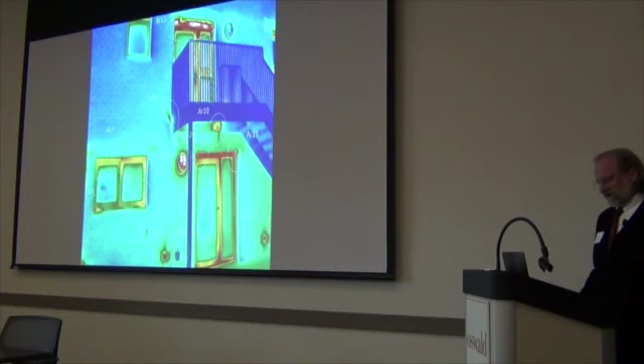...damage to the historic character of the building or unexpected condensation, rot, rust, or other moisture-related problems like insect, mold, or fungus infestations.

It is smart to hire a professional to help with these sorts of modifications to avoid getting into trouble or destroying irreplaceable architectural details in historic fabric.

Lastly, the improvement of the efficiency of heating and cooling equipment, high-efficiency boilers, furnaces, and air conditioning units, along with point-of-use and on-demand hot water heaters, as well as energy-efficient appliances and office equipment, can reduce overall energy requirements and reduce emissions. Altering the sources of energy is also sometimes an option with an older property.

This would entail the addition of solar panels or compact windmills, or maybe even the installation of geothermal heat sources. There's an excellent technical brief on this subject available from the National Park Service. If you want help finding that online, see me afterwards.

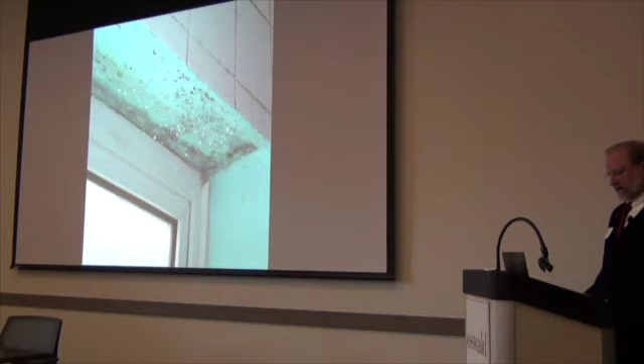Alongside these attributes of historic buildings and strategies for improvement for their energy performance, let's talk a little bit about the other aspects of sustainability that are related to historic preservation.

Preservation contributes to the environmental and economic health and vitality of a place in a variety of ways. It is well documented that designation of historic districts tends to cause an improvement in individual property values, and such designation can protect existing rental space from being demolished.

Preservation conserves resources and the embodied energy that is invested in an existing building or place. It also preserves the cultural memory of craftsmanship, design ideology, and social history.

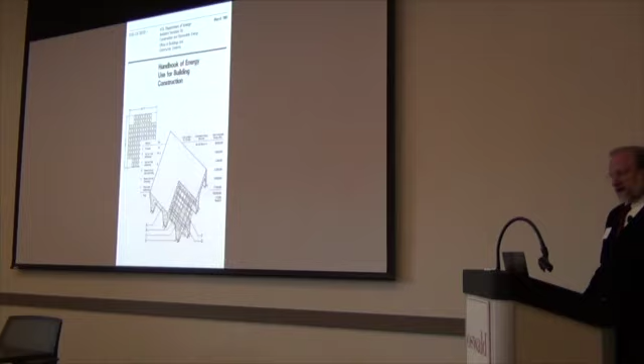Investment in the rehabilitation and restoration of old buildings even produces more local economic activity than the construction of new buildings, because a greater percentage of the investment tends to be in local labor rather than imported materials.

Perhaps most importantly, the preservation of old buildings allows and fosters the essential development of new work, as evidenced in the form of smaller startup businesses and new enterprises because of the lower cost of rent.

The types of innovative, experimental entrepreneurism that is a fundamental part of an economy with the potential to grow and become more vibrant and dynamic is dependent upon the availability of lower-cost, older buildings.

This was certainly the case for Cleveland Public Theater, which operated on a shoestring budget for 2 decades in a pair of low-rent facilities in an old neighborhood that had nearly been written off.

Most Clevelanders, and I would guess that most of you, want our city to develop a dynamic, resilient local economy, safe and appealing neighborhoods, and an environment where government is predictable, just, and provides meaningful opportunities for citizens to be involved in the decisions that affect their lives.

It was definitely important to my business, where I could afford to purchase a group of boarded up and condemned wooden and brick buildings, remove the obsolete fire and water damage sections, and renovate the space for my office.

My development at the corner then inspired and spurred on additional investment on the block, expanding an existing restaurant service business into Cleveland from Medina, creating a new craft beer exporting business, and establishing 2 popular drinking and eating spots in an area that had been scary and dangerous before.

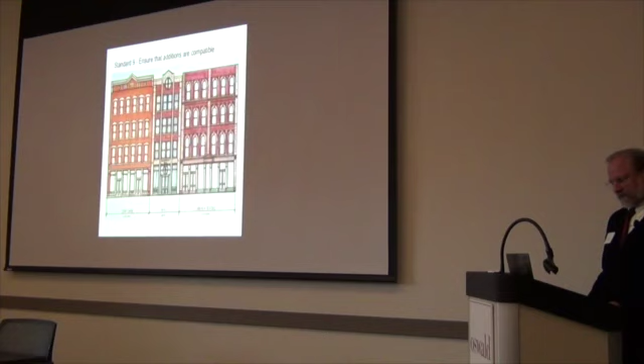If we're to be successful, the policies and practices of government, real estate owners, and design and construction professionals will need to develop better, easier, and more cost-effective ways to improve the energy performance of historic and older buildings, and when necessary, to encourage the construction of new buildings that have low carbon footprints and are efficient to operate.

Sustainability necessarily involves the collective future of Cleveland citizens in an ecological manner, where economic health and diversity is central to the issues of infrastructure management, land use, commercial real estate and housing, historic preservation, public health and education, government performance, and quality of life.

Now, here's the hard part. We need to guard against the ideas of politicians, planners, designers, and developers who would squander our ability to continue into the future. Some of you may have attended the exhibit, probably not many of you, but some of you may have attended the exhibit...

The idea was that almost everything from downtown to University Circle would be cleared to be replaced with a series of very tall skyscrapers loosely based on Frank Lloyd Wright's Mile High skyscraper, and groups of high-rise apartment blocks based on Le Corbusier's Radiant City, surrounded by green space and ponds.

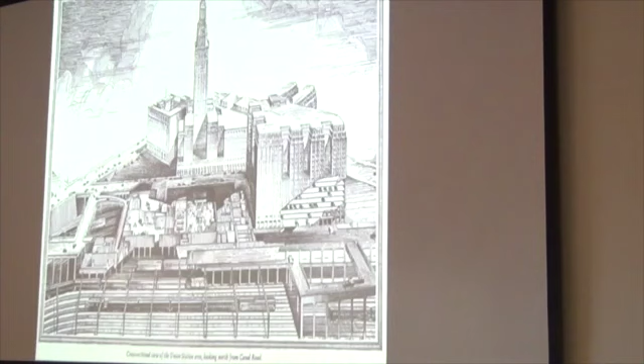Now, here's the big sacred cow and destroyer of the old heart of Cleveland's business district, the Terminal Tower Complex. Thousands of, so they say 1,000 buildings and businesses were relocated or moved out of the way for this building.

And I'm just going to show you about 10 pictures of the buildings that were on this site before they cleared their way. And if you just imagine the kind of diversity of occupants and tenants and building owners and enterprises that could exist in these older buildings versus what we might find in a big office development like the Terminal Tower.

Once they had finished purchasing, maybe people got to retire off the income they had from the sale of their building and the closure of their business.

But once they had it, once it was all torn down, what we have is essentially an empty lot and a parking lot. This is almost the worst thing that we could do, is clear land and create empty land and parking lots.

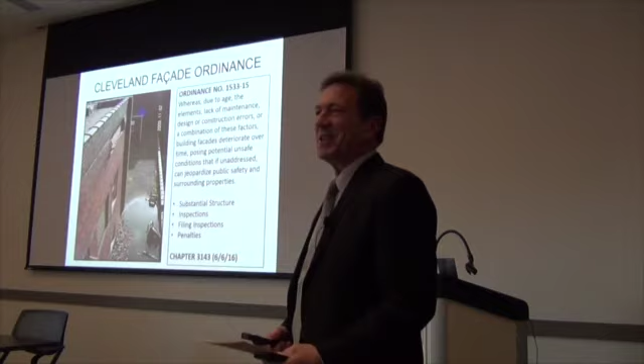Thank you for being here today, and given the fact that tomorrow is St. Patrick's Day, I have to hook it in with a reference to the classic 'Oh Danny Boy.' Oh Danny Boy, the walls and parapets are falling. I would sing it, but I've got my morning voice on.

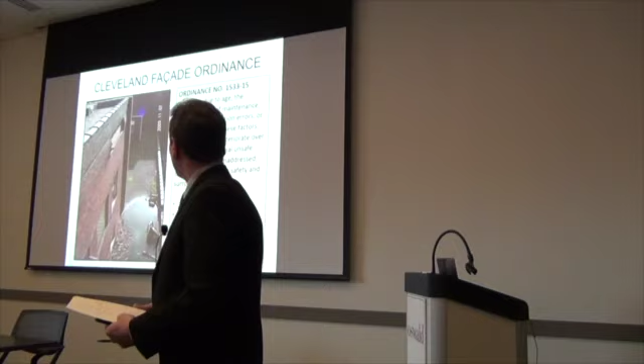Unfortunately, many buildings with brick veneers and facades end up being like this one. This is an undisclosed building downtown, picture taken about 8 years ago, around 2009.

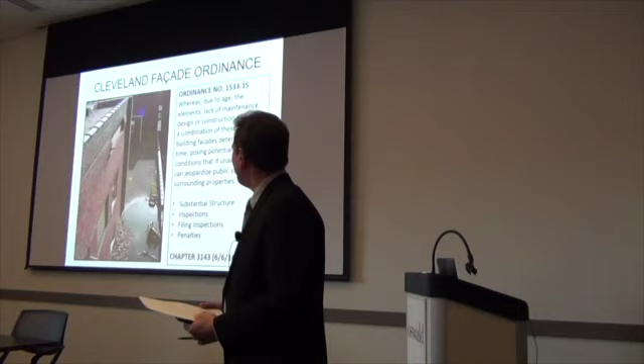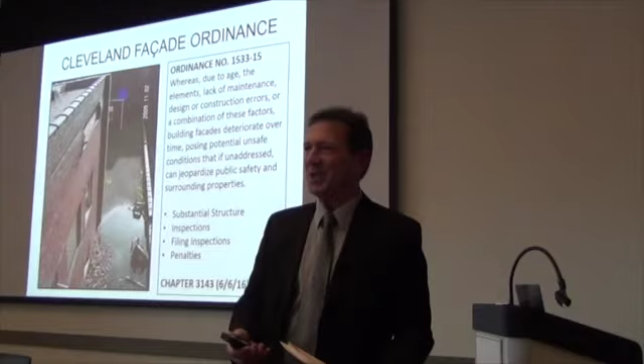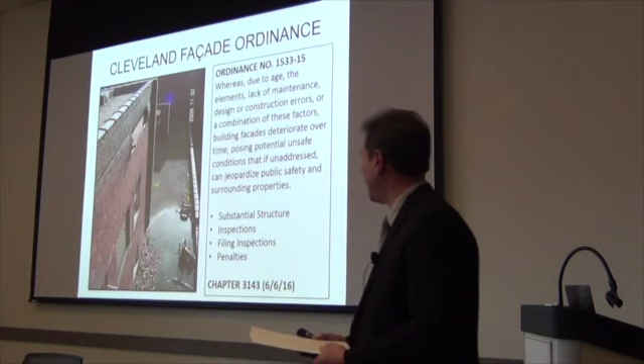A brick facade and veneer can be thought of very much like playing the board game Scrabble, where all those tiles, all those pieces, have to stay connected to the board if you stand the board up vertically. So what you need to do is support those individual pieces with a shelf angle or means of support, a set of hands, and also connect them back to the building, also known as the backup wall.

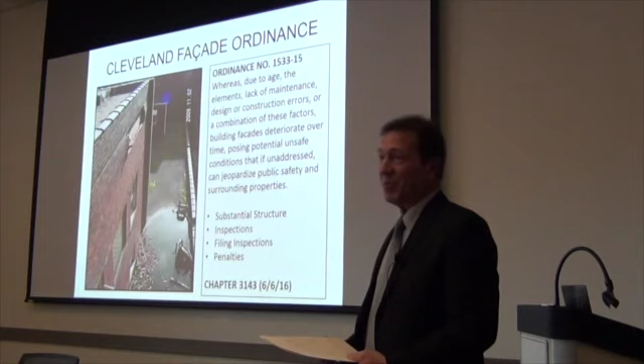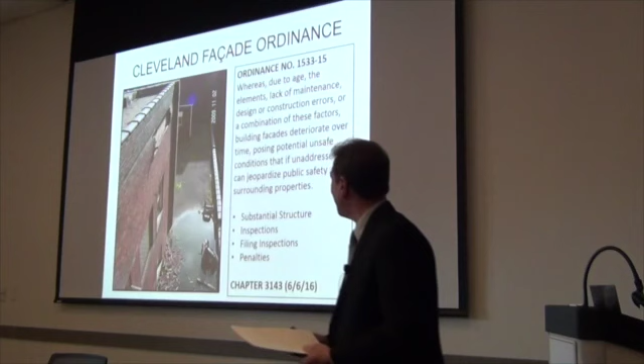As a structural engineer, the challenge is to keep those materials on the building. Everything that went into the building came from the ground — the ore for the steel, the sand and clay for the bricks, and mortar. Gravity makes it all want to go back. So our job is to keep it up where it belongs, up on the building, keep it safe. Nobody wants to see a downtown area be a falling rock zone. That's our role — the architects, the engineers, and the contractors.

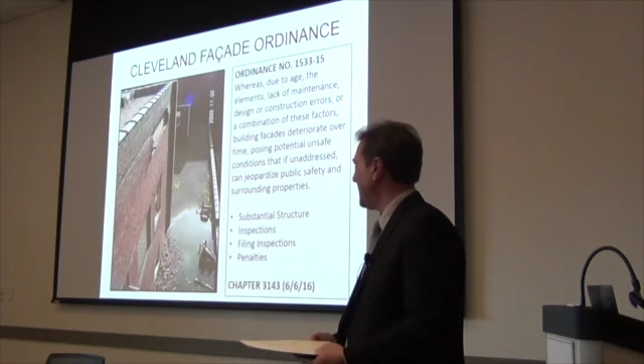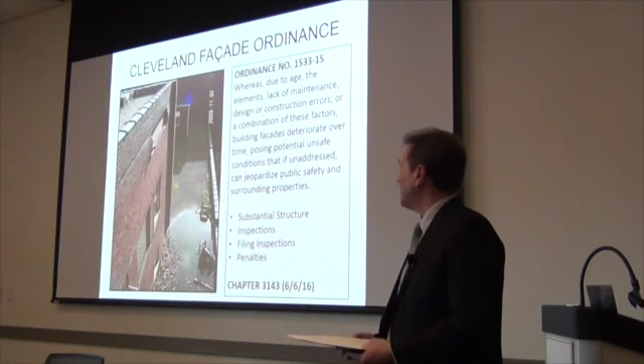We all have to collaborate and make sure the buildings are maintained well and inspected. It's not an easy thing to get out on a building — you often need a boom lift or a rig to look at these up close. You can do a limited survey from the ground with binoculars and telescopes, and now we have drones, which we're getting into using for inspecting and at least getting a visual. But there's nothing better than being right up on the building with a hammer or mallet, doing some light tapping and sounding to predict where material might fall.

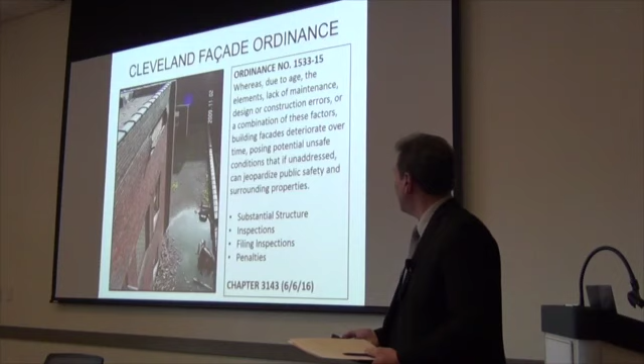This ordinance that was put in place was the result of an incident which happened April 13th, 2015, almost 2 years ago, on East 6th Street. It's called the Garfield Building, and it happened about 4 o'clock in the afternoon. It was a very cold winter, the winters of 2013 and 2014 into the spring of 2015.

Very brutal cold — as materials get cold, they tend to shrink and contract on a building, and as they heat up, they elongate. This building wall, the west wall, was about 200 feet long, built for years and years with no joints in the wall. In the old days they would build walls solid and thick, sometimes a foot or two feet thick, of brick and tile, elongating and contracting over the years with temperature changes.

On top of that, there's a sloping penthouse roof behind it that tied right at the back of the parapet. So for 120 years, snow and ice filled the trough behind the parapet, giving it a little push every time the water would freeze and expand. That portion of the wall was very vulnerable.

So what happened on April 13th — it was the first 80-degree day, and the sun was baking on that wall about 4 o'clock in the afternoon. About 50 feet of the parapet fell, about 4 foot tall and 50 foot long, and that's what happened down on the street.

Now, these people were very fortunate. There were 5 occupants of this vehicle. They had just left it after parking 10 minutes before this happened. They went to dinner, went to a Cavaliers basketball game, came back 6 hours later, and their car was being loaded onto a flatbed and hauled away. So they were very fortunate.

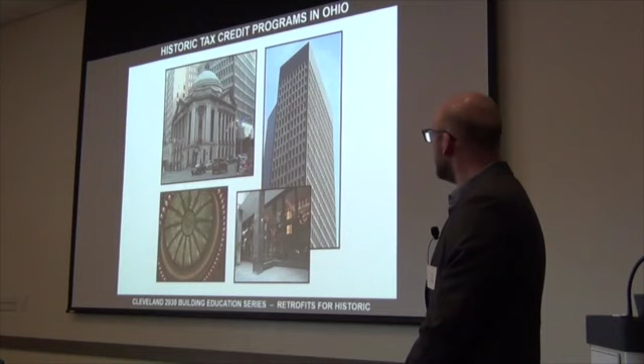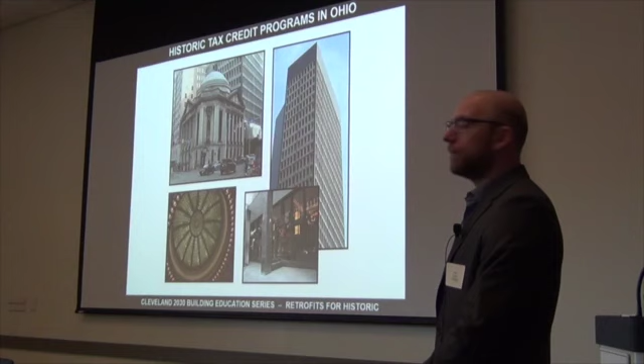Just as some examples, I know we're going to be talking about the 9 later, and this is a good example because obviously the Rotunda building you would expect to be historic, and it has been listed on the National Register for some time, but Breuer Tower was not, and was originally contemplated for demolition, and at that point historic tax credits actually could not have been used on the tower because it had not been designated. So there had to be an extra step to expand that National Register nomination to include the Breuer Tower before the tax credit could be applied to that portion of the building.

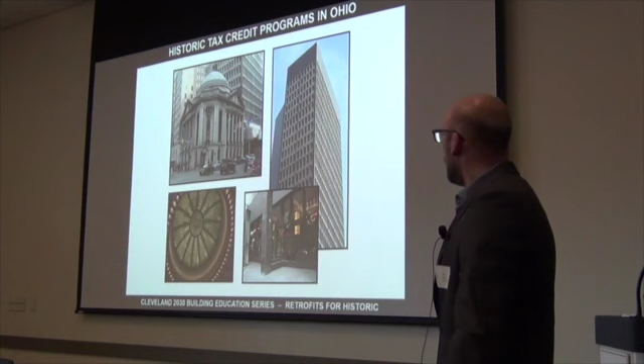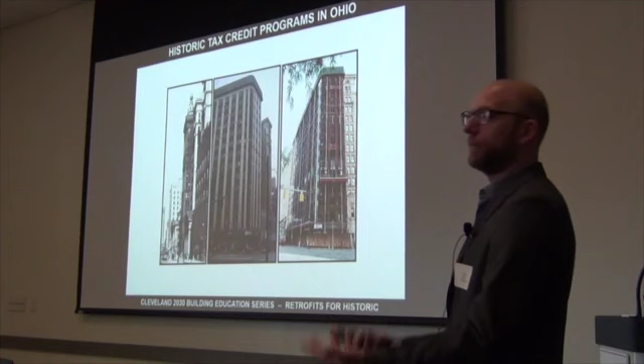Schofield building is part of a historic district, but as many of you know, the facade was completely covered. So before it could be formally designated as a contributing building within the historic district and therefore eligible for tax credits, the entire false facade had to be removed. So that was just the initial step just to get the building qualified.

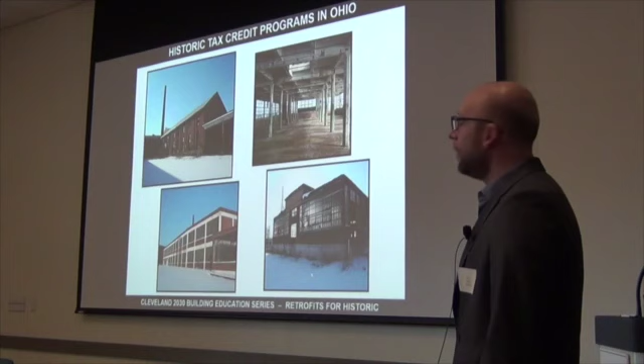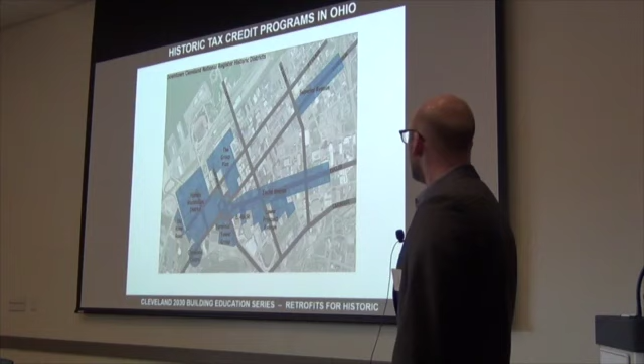And so within those districts, buildings are designated as contributing or non-contributing. And if they're a contributing building within the district, meaning they're old enough and they still have their integrity, then they qualify for the historic tax credits. So again, you can see a pretty large area of downtown Cleveland is within historic districts, so these tools are available to a large number of properties.

The two basic tax credit programs: there's a federal historic tax credit and a state historic tax credit. At the federal level, it's a 20% tax credit, and that 20% is related to what they call the qualified rehabilitation expenditure. So all the money that is spent on rehabilitating the historic building, you're basically going to get a 20% credit against that cost that comes in the form of a tax credit. So that's all the hard costs. It's also many of the soft costs associated with the development.

The big categories that are not included in that qualified expenditure basis: acquisition is not included, any enlargement of the building, so if you're making additions, those expenses would not be included, and things like site work or anything outside the envelope of the building. And then finally, anything that's personal property, so appliances, things that can be taken out of the building would not qualify for this credit. But all those other expenses get put in the bucket, and 20% of that comes back as a federal historic tax credit.

There's no limit on the amount of tax credits. This is a long-standing federal program, and as long as you follow the process and follow the rules, and you have a qualified building and project, you get this 20% federal tax credit.

There's a three-part application process. Part one is just, do you have a historic building or not? Is it on the National Register? And if it's in a district, does it contribute to the district? Part two is about what you're going to do to the building, so that's making sure that the building is going to meet historic standards. We'll talk a little bit about that in a second. And then part three is when you're done with the project, documenting that you did what you said you were going to do in part two of the application, and showing the completed work.

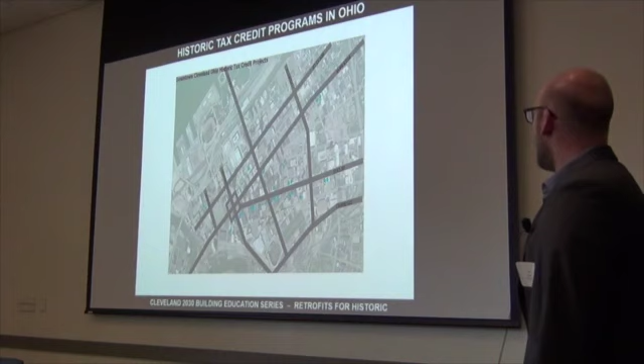If you're doing a historic tax credit project, you have to follow the Secretary of the Interior standards for rehabilitation. That's just a set of 10 broad guidelines outlining what it means to do historic preservation. There's a large collection of guidelines that go along with these standards giving much more specific information about how the standards are interpreted and how to do these things technically. A lot of good information is on the National Park Service website.

Basically what this is saying is repair something before you replace it. If you have to replace it, do it in kind if you can, or with something that matches. Where you need to make changes, do it sensitively so you don't destroy the historic character of the building. But there's a lot of flexibility in terms of the use of these credits and the application of the standards. Sometimes I know it scares people off, but really there's a ton of flexibility.

This is the Southworth building over on Ontario, a recent project, and a common problem in these downtown buildings where you have vast areas of dark, deep spaces toward the rear of the building that you can't really activate for residential use, which is the dominant market in downtown Cleveland now.

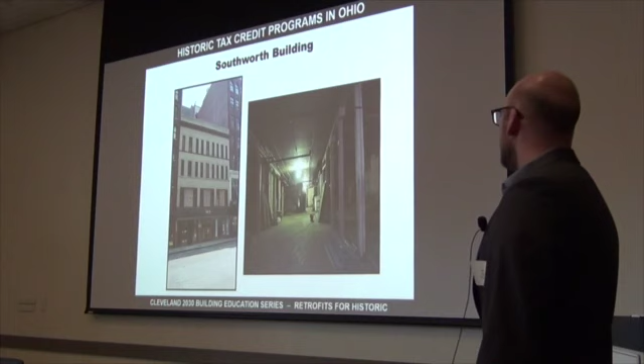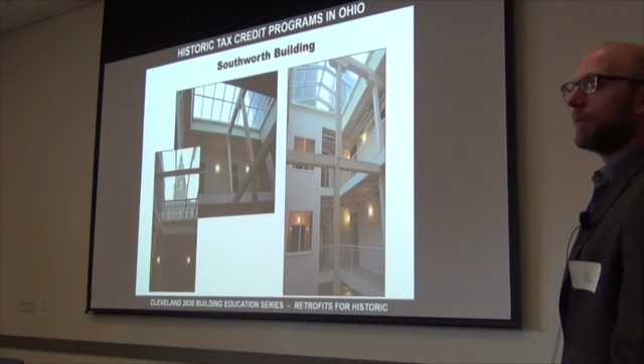So this is the same building. We cut an atrium down through the back part of the building so that you can get light on two ends and get viable housing space in the back. It also makes for a really compelling space, something that's inviting and attractive to residents.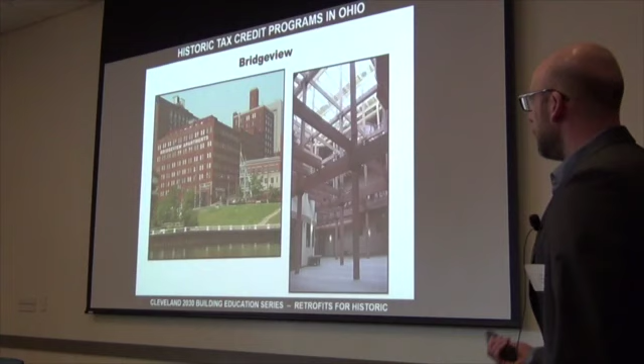Many of you may have seen the Bridgeview atrium—similar thing, created through a big warehouse building, very deep and difficult to convert for another use. Cutting this atrium down through brings the light in that allowed all those apartments to go into the building, and that was all allowed through the historic tax credit program. You can see we also did some rooftop construction, so those kinds of things certainly can happen.

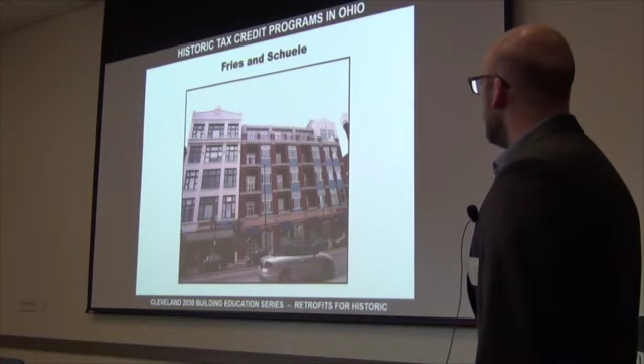Everybody remember when West 25th looked like this? It was really not too long ago, but hard to believe. So that's Fries and Schuele, and again, additions, while not qualified for the historic tax credits, certainly can happen as part of a historic rehab project—that's common particularly for a smaller building. So that's one that was filled in with a new addition: apartments in the historic building and condominiums in the new. You can see the wall of the historic building then becomes part of the interior courtyard.

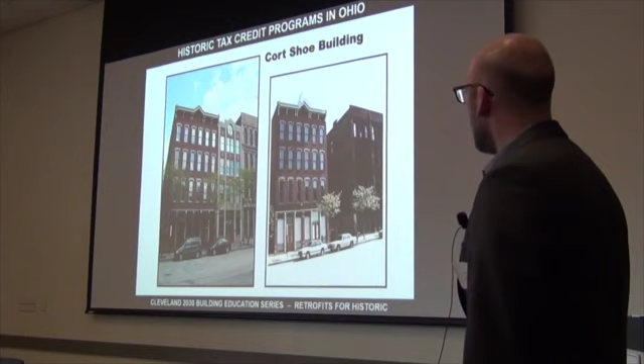This is our office—it's another infill project in the warehouse district. And there's my contact information.

So yeah, just again to recap, it's a really important tool, absolutely necessary in most of these historic rehabs, and a great resource for building owners that want to rehab their buildings. Thank you. Questions? What about government buildings—what aid or funding can they get for renovating some of these historic buildings?

Since the building has to be income producing, it can have tax exempt tenants, which happens all the time. But government entities have a hard time using historic tax credits—they rely on other sources of funding. Yeah, it does have to be a privately held, income producing property, so you can't use this on your own house or anything. You also can't create condominiums, at least for the first 5 years of the project, because you're not allowed to sell the property for 5 years after you complete the rehab.

Does that mean 501c3s that own the structure don't have any benefit from this? 501c3s are a tricky animal—they can absolutely use it. A lot of nonprofit organizations have used this. The Cleveland Institute of Art, for example, their building on Euclid, the old Ford Motor Company plant—that's a historic tax credit project. It creates some complications, particularly if the nonprofit occupied the building prior to undertaking the rehab project, but a lot of times there are ways to work through that. So nonprofits typically can take advantage of these, and often do.

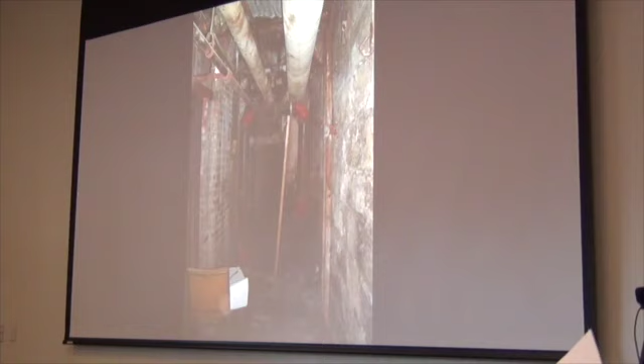My first visit to the property was in the fall of 2007, quite a while ago. I toured through the property with one of the people on the development team. He showed me its current condition and asked what I thought about trying to do something different with it, which I told him I thought was crazy. I didn't know how it was going to happen, but somehow he convinced me to be involved. I have this photo here that shows where this really all started, the process of putting this building back together.

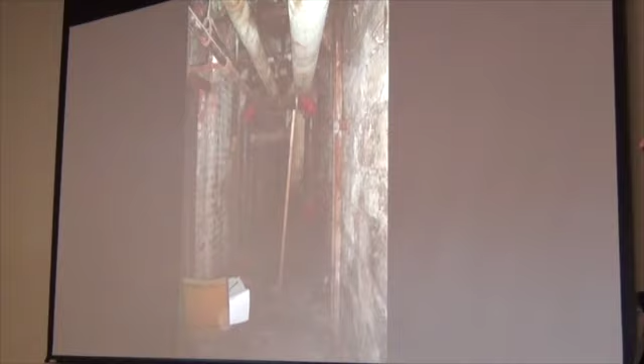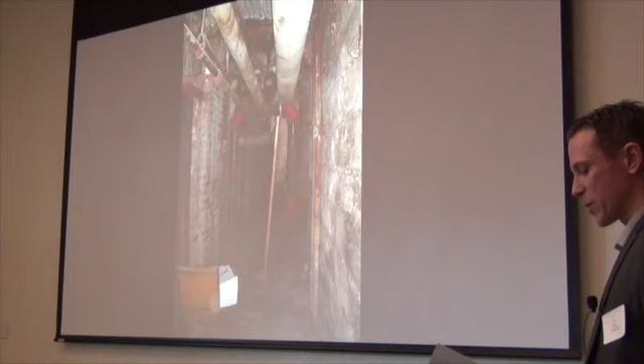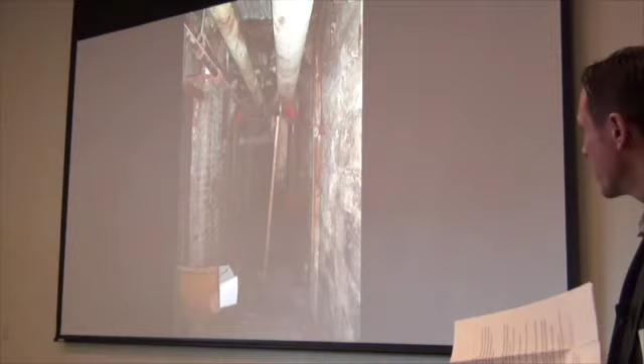As Peter had mentioned earlier, the first step was to roll the dice and pull that curtain wall off the building to reestablish it as contributing to the Euclid Avenue Historic District. To do that, we had to get mast climbers on the building on a tight site, to access the panels and start pulling them off. Even getting to the point where we could have the mast climbers was complicated, and I spent quite a bit of time in the basement and in these sidewalk vaults. We had to do some analysis to figure out how to put substructure through the sidewalk vaults to support the weight of the mast climbers, just to get to a point where we could start to peel off the curtain wall and see what lied beneath.

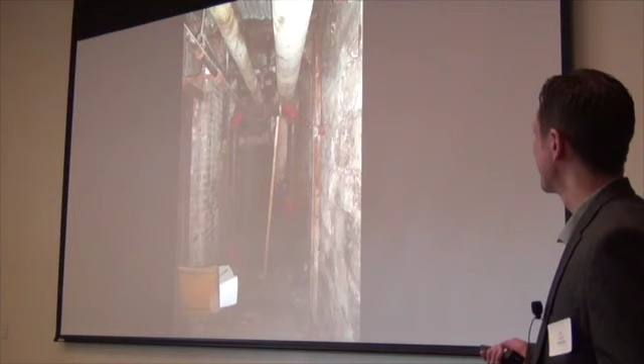I guess they figured if this didn't scare me off, nothing would. This is just showing a bit of progress on taking the curtain wall off. We were all curious to see what we would find beneath.

Essentially what we were left with was the face brick was in relatively good condition, not much of it was damaged. But the curtain wall, where it had been placed onto the building, was just tight enough into the original masonry that they blasted out every detail that had any real relief to it. So a lot of the decorative terracotta elements have been either completely removed or severely damaged. This is a shot of essentially what we were left with when all the curtain wall had been removed.

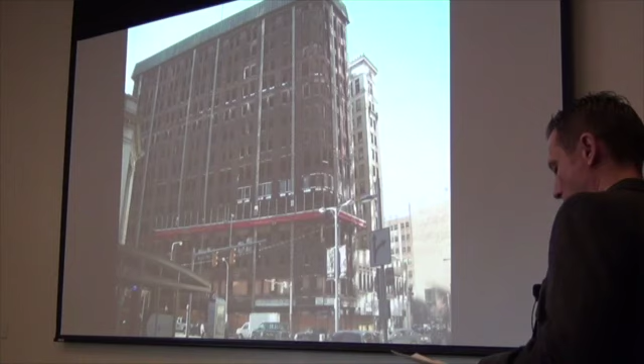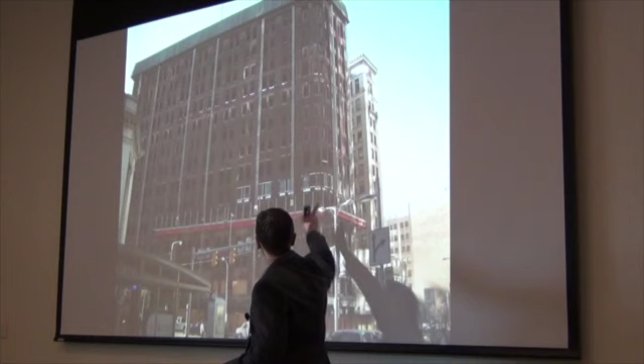In spite of this appearance, as Peter had mentioned earlier, it was established that the building would be considered contributing to the Euclid Avenue Historic District, and we would be able to move forward with the tax credit process. One funny thing to note in this photo: if you notice there's still some windows in place right through here, we had a period of overlap, just a week or two where the last tenant in the building, who we were helping to relocate, had to stay in business. It was a dentist's office.

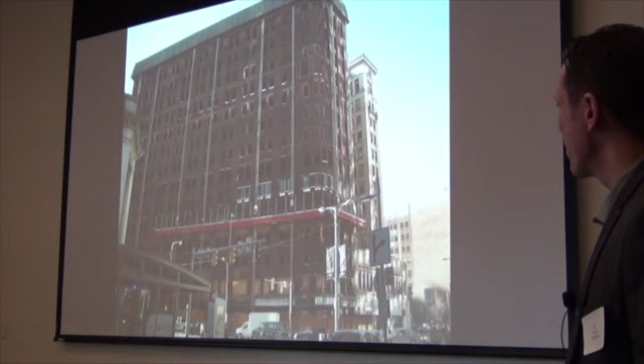We were all wise enough to know that this was not the most weatherproof condition we were left with, but hoped that things would work out. Of course, a night or two into this, a horrific torrential downpour storm moved through, and the space took on a little bit of water, but we all worked together to help clean it up.

I want to point out a few things on timing, then we'll get into a little more detail on the exterior restoration. Once the building was considered to be contributing again, it was 2008, 2009 timeframe. Also, the financial crisis was in full swing. During that time, we were doing a lot of work determining the right mix for the project in terms of hotel versus apartment in order to get financing. So there were many iterations of the plans, studying the various mixes in the building to get it just right in order to work for financing and the pro forma.

In 2010 the credits were awarded, and from 2010 to 2012 there was substantial interior abatement going on, demo, and materials were brought down and sorted for recycling. We were diverting as many materials as possible from landfill. Then in 2013 we were all in with the AE team and the construction team, going full speed ahead to really start putting it all back together.

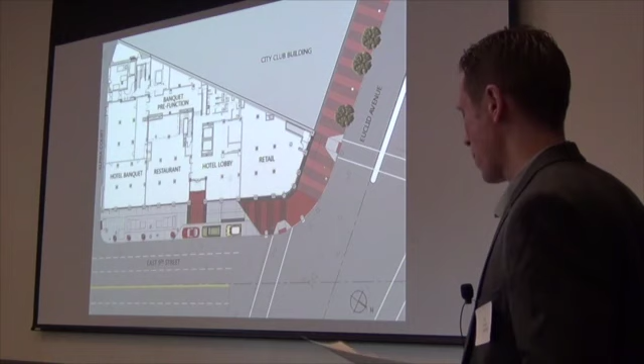Just a couple of typical floor plans here. Essentially, the 2nd through 7th floor are pretty much the same plan, and then the 8th through the 14th floor are pretty much the same plan. 2 through 7 are the hotel floors. There's a variety of hotel suite types. The larger, more special suites are focused to the north end, where you have the greater, more expansive views.

Similarly with the apartments, there's a variety of suite types and sizes. The bigger, more luxurious suites are focused towards the north end, again with the big expansive views. There are 122 hotel rooms total and 52 apartments.

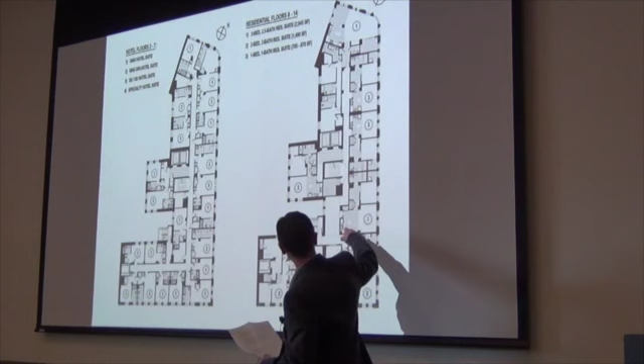The suites, hotel and apartment, were planned around the original corridor path through the building. Really the only exception would be in the apartment floors, in order to get the units to lay out and be viable, it kind of drops back tighter to the exterior wall just back here.

One other thing worth noting is the central stair, which was that last existing piece of history on the interior that we wanted to feature. It had been enclosed over the years as a fire stair, surrounded with a masonry wall. We wanted to find a way to leave it open to the corridor as you were passing through, without having to jog around it. One, we would be losing some precious space on a tight floor plate. And two, we really wanted people to be able to walk by and experience it.

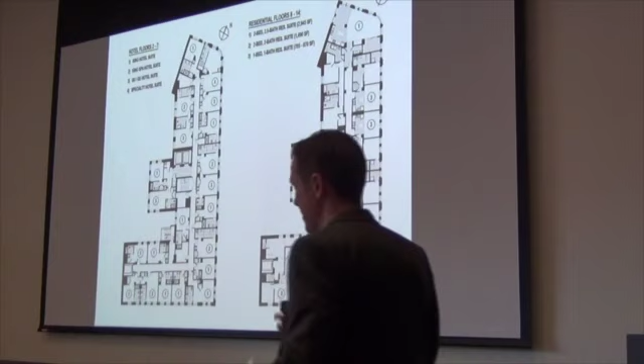So this condition you're seeing here in the middle, we used a total door, a concealed door system that opens into the corridor wall. Those are on hold-opens, and in an alarm situation, they close down, becoming a completely enclosed rated stairwell. The building went through the alternate compliance, OBC Chapter 34 process, figuring out how to do the compartmentation in the building, which is breaking it down into smaller fire areas.

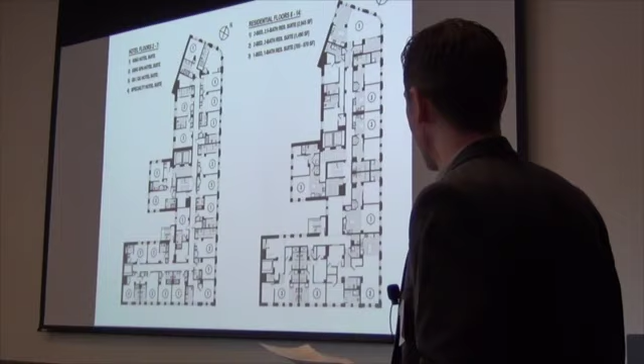Let's run through what we would say are some of the bigger project challenges.

So we had to be very clever about where we were planning vertical shafts and openings through the building, to make sure we were limiting how much of the existing structure we were removing.

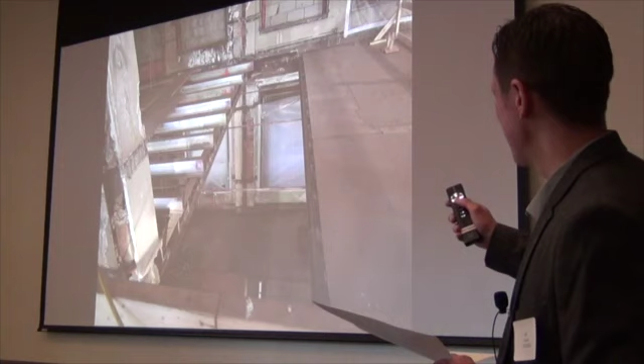This just kind of gives you an idea of some of the systems we were dealing with, where we increased the depth for the new elevators in place of the old. You did have to drop out part of the bay, marrying together a new, more modern steel floor system with the old structure.

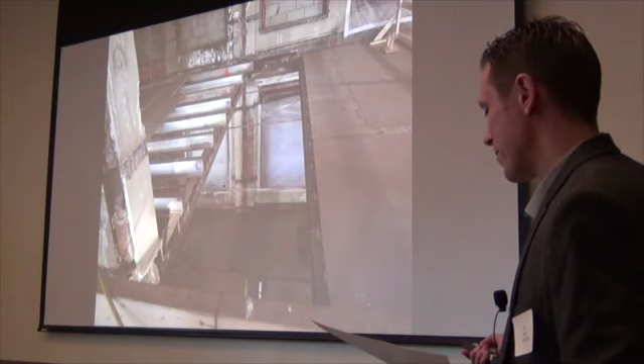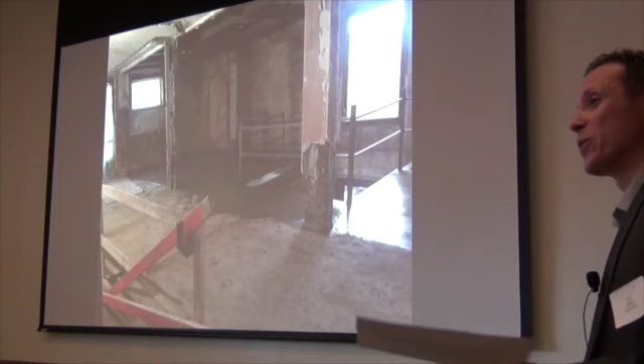We also found, especially on the ground floor, a lot of the exposed steel had corroded. It was from salt damage where various entries on the building had been relocated. I think we almost got to a point with the ground floor where, in hindsight, we might have been better off demoing the entire thing and starting over with a new floor system, because we ended up doing so many infills to it.

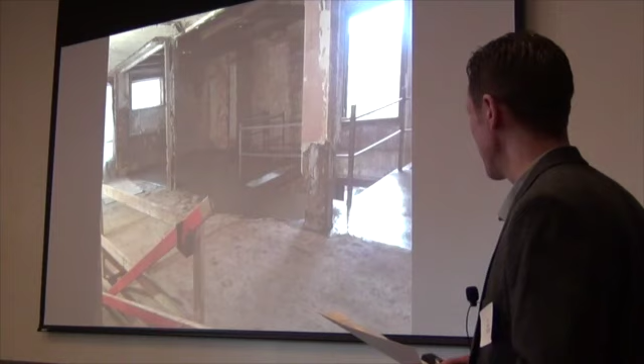This was something I mentioned earlier, that enclosed spiral fire stair. The upper left corner there, between the edge of the window and the little jog in the masonry, was about a 6-foot radius masonry structure that went all the way up and down through the building containing one of those fire escapes. The decision was made pretty early on that we needed to remove that, because it gave us much greater flexibility to get another stack of hotel rooms in there, as well as a more viable apartment unit back in that corner. So that all came out. I felt pretty guilty about that decision, seeing the amount of labor that went into removing all that masonry.

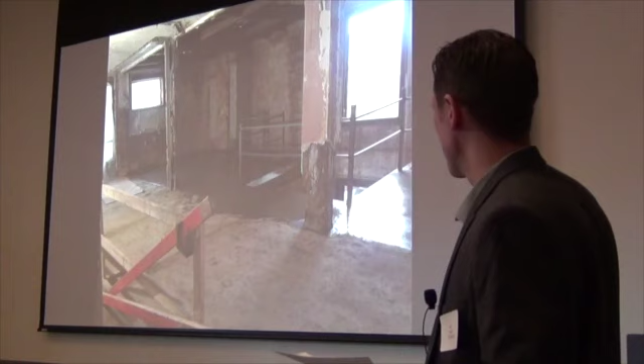And then across that back section, the opening you're seeing there is where the freight elevator went in through the building.

Another detail I wanted to mention: the building had a sleeper system beneath the subfloor that was pretty much intact throughout. We tried to do something a bit clever where we cut into the sleeper system in select areas to create a curbless shower detail that appears in some hotel rooms as well as some apartments, which is a little bit of a luxury touch and a unique way to approach that sleeper system layer.

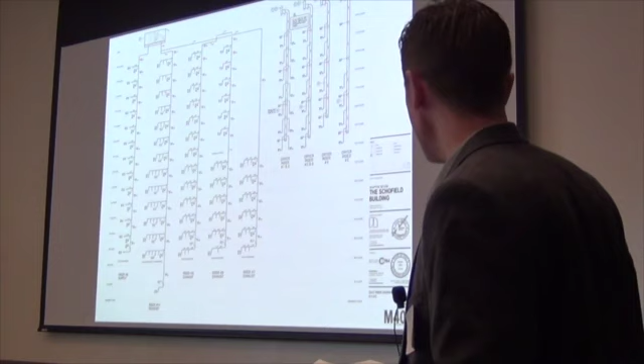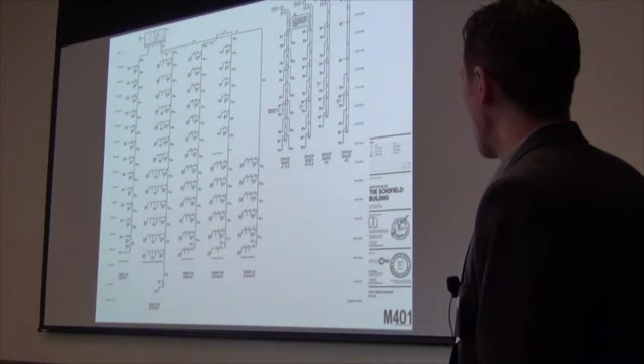Another challenge we dealt with, again getting back to vertical systems and conveyance, is the stacking of the apartment floors over the hotel. You can see at that 7th, 8th floor line the transitions that were made in the stack diagrams here.

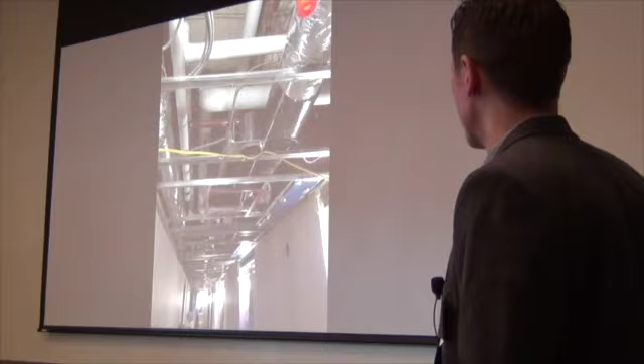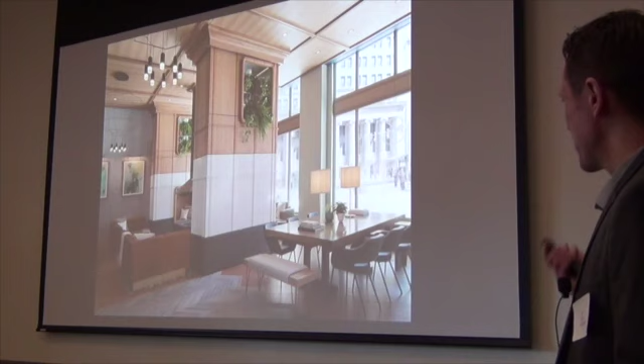Got a few before and afters to share. This is an original shot of the building lobby prior to renovation, where it was off-center. And this is essentially from the same angle — the building entry moved back to that bay north where it originally was, opening up more space for the building lobby, which includes a fireplace, and these millwork column enclosures with little seating niches. These seem to be favorites for photo ops when people are visiting.

I really like this shot — this is the transition from the pre-function area into what's now the banquet room. You'd be surprised how late in construction this photo was taken, because the ground floor was so complicated to put back together, it was a little behind the other floors. This just kind of shows what that area looks like now.

The restaurant was also a bit of a challenge. Their kitchen, along with the catering kitchen for the hotel, is all in the basement. Getting the necessary exhaust out of the kitchen space, winding up and through the building and getting it to that second floor roof, was a real routing challenge — a bit of a maze to figure out.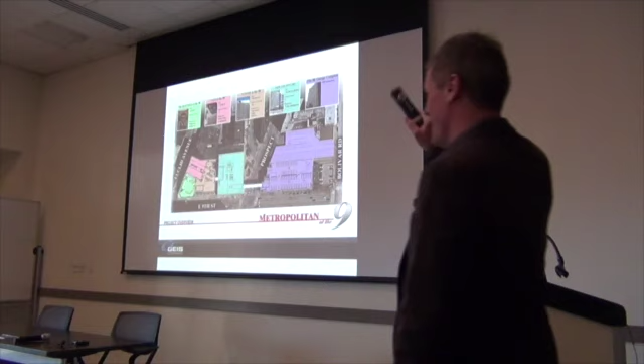But as you can see, we have all these buildings. If you look on top where it says Tower at the M, that was the original name of this project. Then we found out that Marriott Hotels had copyright on the M, so we had to change the name to the 9. Obviously, if you're from Cleveland, you know a lot of the history about the building, so I'm not going to go too much into the historic value and what it means to the city.

Okay, we are truly fiber. And the reason we went that way is because of all the systems that are in the building. We have a hotel system for reservations.

We have a hotel lock system, hotel HVAC controls. You check in, the units kick on, everything goes. You also have the residential part of all these aspects. Then you have all the ledger bars, all the bars and restaurants, all their point of sale systems.

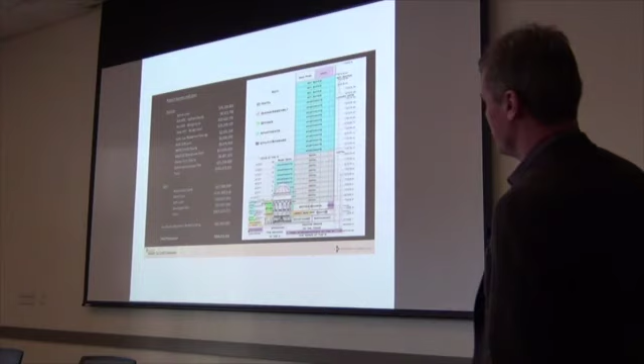We got it done on time, and the reason is back to this initial slide of all these companies. In our construction office, we had our construction managers, the ownership group, the architects, the engineers, and I was part of the Geis properties team. We were there because we're the ones living with this at the end, so we had a lot of input into this project. We were able to get this done because all of us were sitting kind of in rows in our construction office.

A few other highlights: the entire project was done with prevailing wage, and we had the entire building leased by the time we closed in March 28th. So all our residential units were 100% leased. The tenants obviously weren't moved in at that time - we ended up actually moving in 20 tenants a week into the complex after this September 6th date. It was just nonstop, three different shifts every day of people moving in, moving in, moving in, moving in.